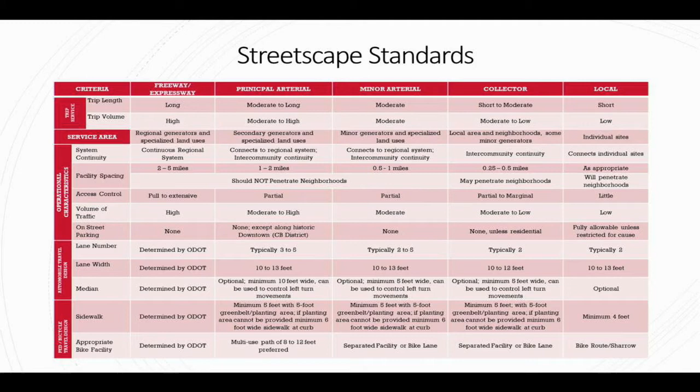This is one of the densest articles in the code. This is your streetscape, access, parking, landscape, signage, lighting, design standards, and sidewalks. So there's quite a bit in here. Much of this has remained unchanged, but what we've done is put it all in one place, put it in tables, and put it in graphics to make it much easier to understand and comprehend. An example of that is your streetscape standards. Depending on the type of road that you're on, there are different standards for each one, where those should be placed, where the sidewalk should be placed, how a median might interact with it. So all of that is now in one table.

For access management, we've put this into a table to make it easier to understand. So in this scenario, if you're reviewing a PUD or a site plan, there's now a table you can reference to go along with your engineering comments in a staff report about where driveways should be placed and how far apart, to ensure they're a safe distance apart.

Through the comprehensive plan, one of the items we talked about heavily was access management. We've noted that some commercial corridors in Yukon have higher traffic and cause backups. Part of that is access management. When every single user has its own driveway, some sites have 4 driveways, and the conflicts created by having that many driveways can create problems. So our goal was to reiterate in a table what proper spacing should be, so you have that as you're reviewing your cases.

And there's also non-residential driveway separation. Within the code, we now have more graphics about what that looks like. On the minor and major arterial, non-residential, it's 500 feet. Say that one more time.

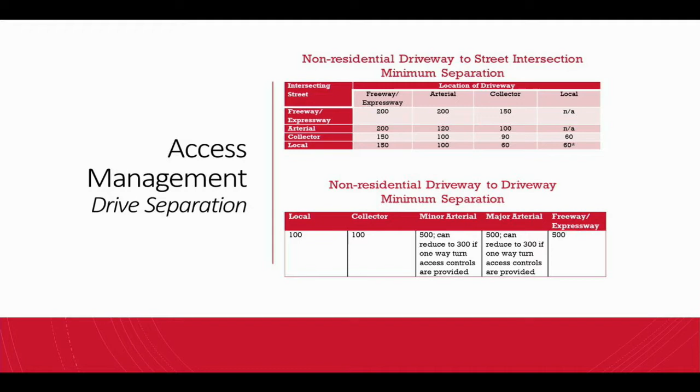And it can reduce to 300 if one-way turn access controls are provided. Is that like you're talking right turn only?

Correct. So if you look at the screen here, occasionally on some intersections or boulevard approaches into developments, you'll see a divider. What it does is prevent someone from making that left turn. Discourage, discourage. Large trucks can always hop it. Welcome to curb, Yukon. It's all about the wheelbase.

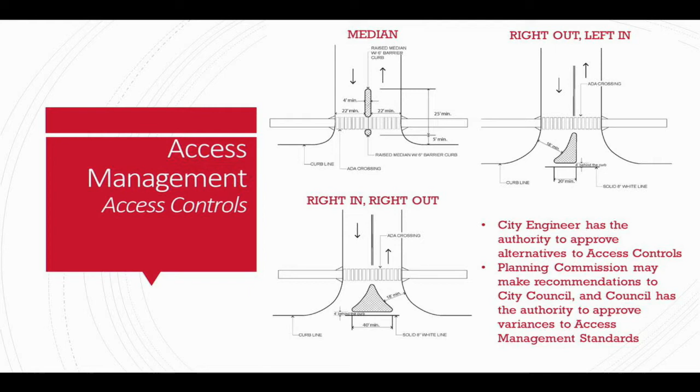Okay, thank you. And so this slide just shows some of those options. Obviously, engineers or design firms can propose alternative ones that you all would review during that plan stage, but these have worked their way into the code.

And then parking and loading. I think sometimes we as professionals in the industry and as planning commissioners know parking stall dimensions, how wide and how deep they are. But if you're just a resident looking at the code or a developer, you might not be as familiar. So we've added graphics to show how these parking lots would lay out and the dimensions required.

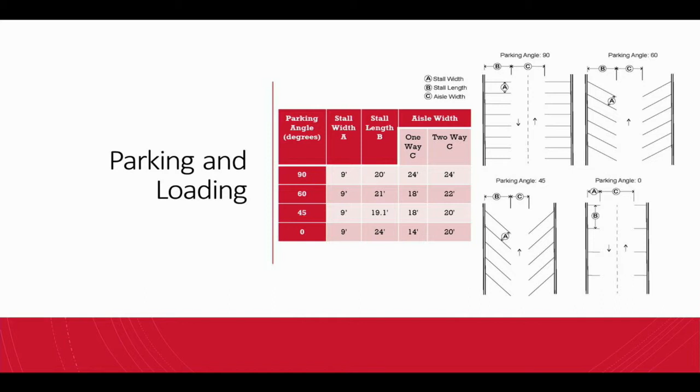Parking and loading, one of the new things we put in the code is the potential for a reduction. In order to receive that reduction, you would have to provide additional landscaping, bike racks, or different types of parking for motorcycles or scooters. But you're only allowed to reduce it up to 15%.

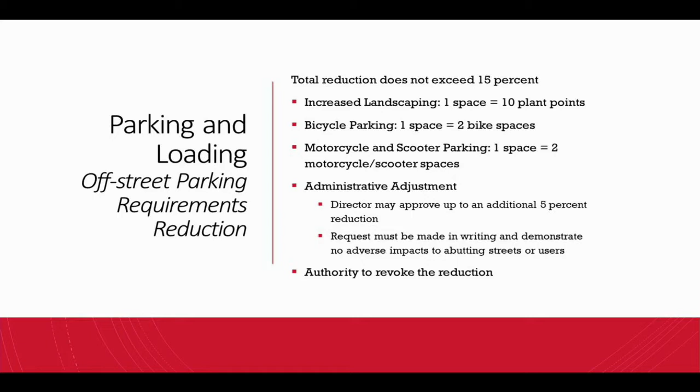I think in recent years, with ride sharing, you've started investing in sidewalks and multi-use pathways, so for some users, code might require too many parking spaces. This gives a bit of a reduction, a carrot and stick approach—if you're getting something in return, you're allowing that small reduction. Ultimately, if a user changed, the city has the authority to go back, and if a parking problem is created, require the current property owner or tenant to make arrangements for additional parking.

Landscaping is one of the big ones. We've talked about it multiple times through the comprehensive plan, in our survey, and through conversations with stakeholders, including Planning Commission and City Council. There's really a feel that our corridors and commercial areas were just not landscaped enough, and not on par with other municipalities.

So this is what the current requirements are: 2 trees plus 1 tree for every 7 parking spaces. Most codes tie parking and landscaping together as a way to calculate that. So what was the change on that from the original code? I mean, that is the original code. Okay, and so this landscape plan is what you would see for this development.

This was a project that had come through recently. You can see there are 2, 4, 6, 7 trees on this property.

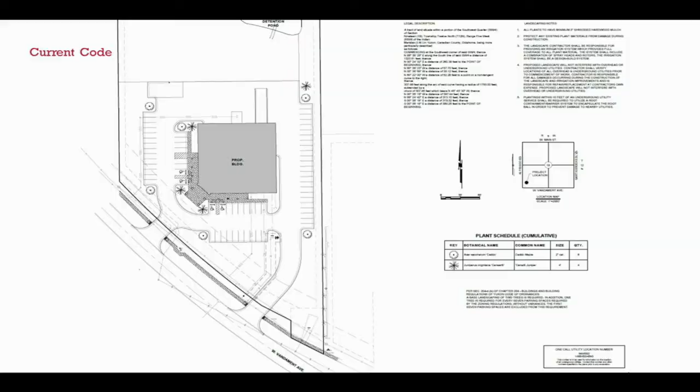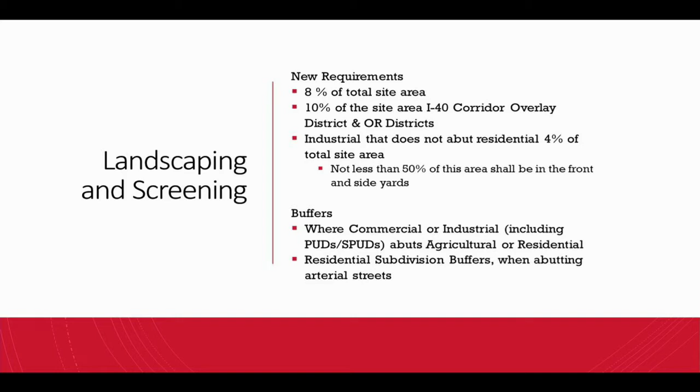With the new code, what we're requiring is 8% of the total site, 10% of the site in the I-40 corridor. Industrial uses that don't abut residential are 4%, and then we have buffers. We started baking into the code mitigation between land uses that might not be compatible. So where commercial or industrial are abutting residential, those landscaping and buffers are more intense because those uses might not be compatible. So what that same site plan would look like under the new code is much more landscaping in the front and on the sides, and then just an overall increase.

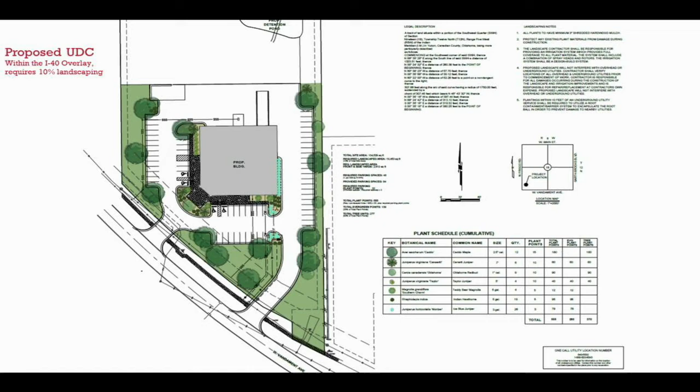We've compared this to Oklahoma City and Edmond. This is not greater than Edmond. It is closer, slightly more than Oklahoma City's code, but we feel like regionally this is an appropriate amount of landscaping. Your current code is not quite providing enough. Mark, I would say that it's right on par with what Oklahoma City requires.

So then we move into lighting. We thought this was a creative approach. There are standards that prevent light spillover from commercial uses onto adjacent properties, and requirements about fixture height. What we liked was we put in the code a maximum restriction. What we're allowing for, though, is if somebody comes in and wants to do something different, they can provide you with a photometric plan showing how it lights up and what fixtures they want to use. That allows them flexibility in their project if the code requirements for the fixtures aren't quite what they want, as long as they provide you the right details to make that decision. So that height is just height above wherever the base of that light is.

Correct. I mention that because in Yukon, we have the future Frisco corridor between 66 and Vandament, where the height of the future buildings is probably 30 to 40 feet higher than the residential to the east. So the light that's 20 feet appears to be at 50 feet to the house. How is that accounted for?

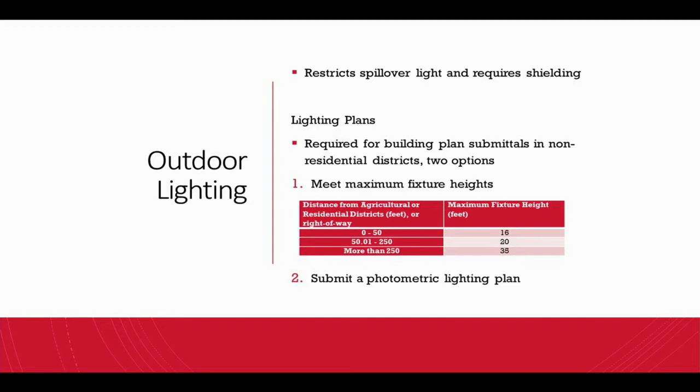The other thing I'll note is to get to that 35 feet, you have to be more than 250 feet away from the residential neighborhood. Is that to the lot, to the edge of the lots, or to the property? Could be to the property structures. Okay, thank you.

Signage—we put in a table with the new zoning districts, but ultimately signage was not amended or changed. We had a meeting with some sign companies and stakeholders, and through this whole process it was always the intent not to change or delve into the sign code.

Sure. I may defer that to Kelly as she looks through the code regarding EMC signs and how that was treated. But we can come back to that after.

Perfect, she finds it. So just a few things. I mean overall it's pretty good, but let's see. So permit procedures, section G. There's a few things that, I think are mistypes, but they do add to some confusion.

I wonder about some of the requirements for permitting, just thinking about today's age and what we're able to get from our clients. Two sets of plans and a digital copy submitted in PDF format seems like overkill. A lot of this is done electronically where you'd just send a site plan. And with site plans needing to be to scale, that's a very difficult thing to produce sometimes. I know the city is open to that, but if we're going to follow the code, I think it can be tough, put it that way.

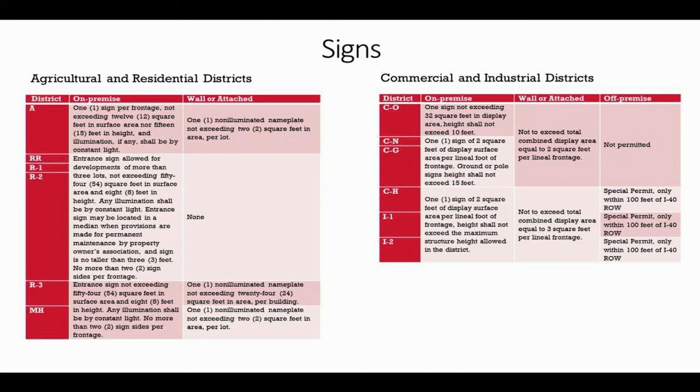So the building materials, this was one we talked quite a bit about at length. Current state statute prevented us from putting any design requirements on single family. It did not restrict design requirements on duplexes or more intense zoning districts. So what we did in the code, knowing we couldn't tackle requiring single-family homes to be 70% brick, was include some design requirements on duplexes, triplexes, fourplexes, and any multifamily projects. The purpose was to ensure those zoning districts and structures have longer-lasting materials.

That's brick, Hardie board or cementitious board, native stone, glass, metal, and all those requirements. We also included a restriction of 25% of architectural metal or aluminum steel on facades visible from public streets. EIFS and other insulated wall cladding is allowed, but only up to 25% of the structure and above the ground floor. We prohibited plain or painted concrete block, tilt-up concrete panels, prefabricated steel panels, and corrugated metal siding, so those would not be permitted.

So for someone to propose something like that, they would be required to come through the rezoning process into a PUD or SPUD to request that. And with that, they'd have to have the architectural details and elevations and be seeking your approval through that process. Yes, sir. However, there was a meeting last week after they got the single-family legislation passed last year.

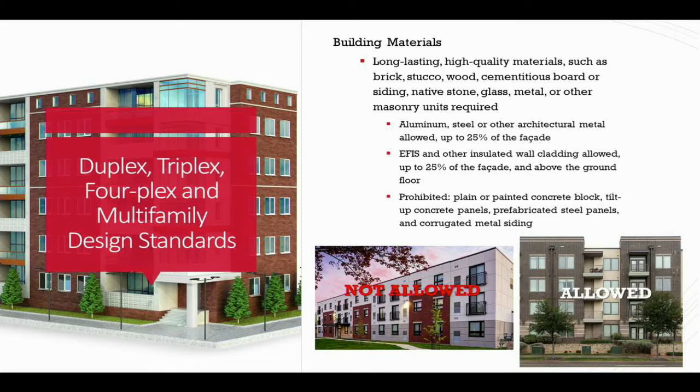So with the duplexes in particular, these are in the code. We went back and listened to old planning commission hearings. We looked at all the PUDs that had been approved to figure out what was being changed when duplexes were being adopted, what was being said, and what were some of the bigger concerns.

So what we did was create these example site plans that are in the code that show you how you'd have to lay out your property if you were constructing a duplex. What that looks like is detached garage versus front-facing garage. The front-facing garage is one of the biggest requirement changes in the code.

Your front porch and front door have to extend closer to your front property line than your garage can. Typically what you see in what's been built is a large two-car garage, big metal door, and the front door of the house pushed back. You have two 20-foot garages right at the front of the street, and that's all you see — no other architectural detail. You see garage and you see roof.

Knowing that we can correct that in the code and create a better product, we've done that — that's what the second one on the screen is. It's showing a smaller driveway that's shared between the two units, so you don't have an expansive 40-foot approach. And then you have those front porches that are also required.

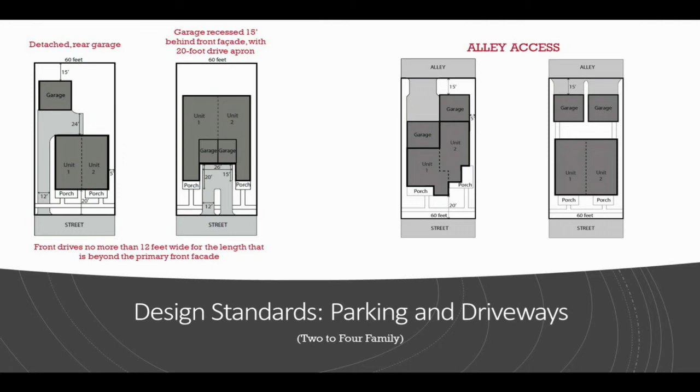It's when the permit application happens, not when we vote on it. Okay, that's good news. Thank you.

This is just an example of if they're not building garages and they have a parking lot, the amount of screening that's required from the street. So it's trees 25 feet on center, continuous shrub plantings, and a combination of berms, shrubs, trees, and/or fencing to create an opaque visual barrier at a height of 3 feet.

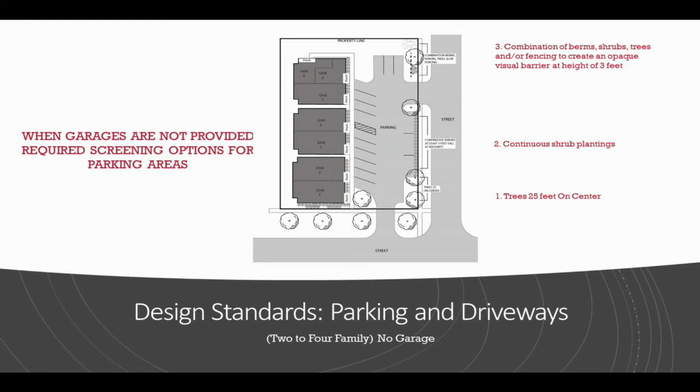These are design standards for some of the entries. Porches have to be at least 4 feet deep and at least a quarter of the unit width. So if you have a 20-foot wide unit, they're going to be required no less than a 5-foot wide porch that's 4 feet in depth.

For courtyards, this would be on a deep lot or a wide lot when all individual entries cannot face a street. They would look inward, kind of like those California bungalow courts you've seen in older TV shows, because they have that courtyard in the middle. And then on corner lots, each entry would face each street frontage. This avoids any one street frontage from getting neglected and just having that blank wall appearance.

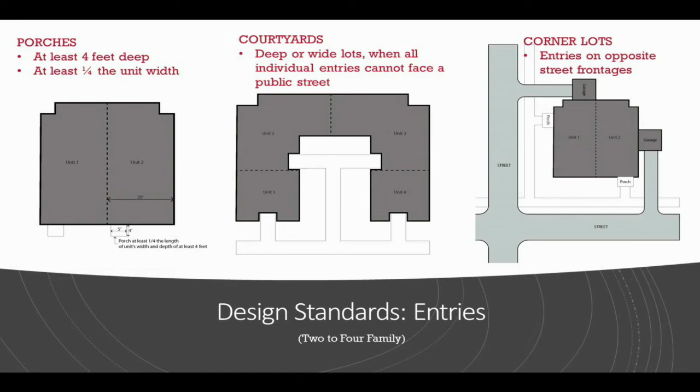And then we move into the commercial standards. This was also one that was talked heavily about during our engagement process. We've prohibited concrete and metal from exterior finishes unless adjacent buildings on both sides have those materials. So if this is in one of the industrial areas and you're smack in the middle between two buildings that have that, you'd be permitted that. But you would not be able to introduce that into an area that doesn't currently have it, and it has to be on both sides. The metal cannot be more than 25% of the facade, similar to the previous requirement.

Safe pedestrian access through parking lots into the building is required. Utility meters in the code, we've encouraged them to be located on the rear and on the sides, not in the front. And then we've got some additional requirements for roofing materials for metal roofs and flat roofs that require certain types of screening of mechanical equipment, so if you have it on the front, you're not looking at the building and seeing the big air conditioner.

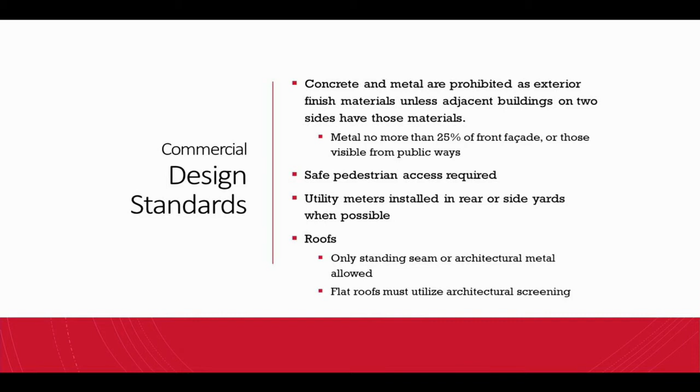Sidewalks, we have put into the code and clarified. We worked with our city engineers on this. So 5 foot is required on all arterial and collector streets, but if they're put adjacent to the curb, then they have to be 6 feet. Our preference is always going to be the 5 foot sidewalk with the 5 foot green belt in between. It gives more separation and is a more comfortable and safe pedestrian experience. And then within subdivisions, we've maintained the 4 foot wide on all local streets, since those have lower traffic, so the narrower sidewalk is sufficient there.

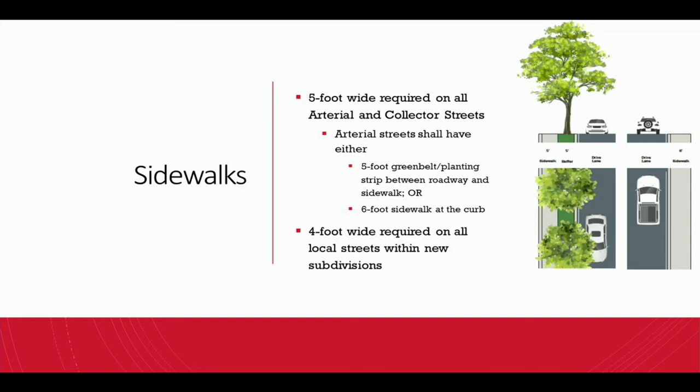So Article 6, we move into the infrastructure and public improvements. This is your streets, alleys, utilities, and other improvements. A lot of this is what came out of the comprehensive plan in working with the city engineer. We're just making sure that it is clear to the development community that when they do a project, what exactly is expected of them from utility improvements, what size lines need to be constructed, and when and where they need to make those extensions. So if they're within a quarter mile, it is just automatic that they're going to have to extend those utilities, rather than use a private well or septic system.

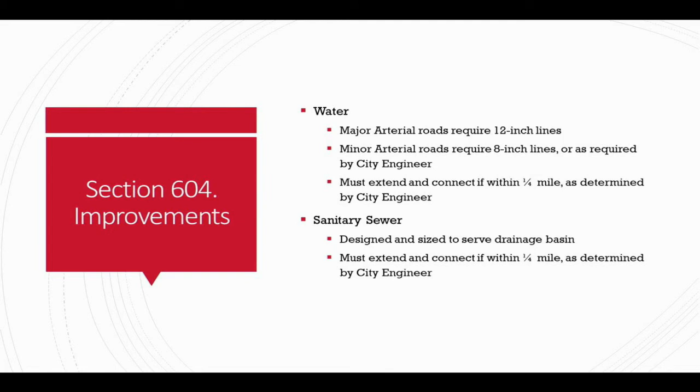One of the biggest things that came through, and we worked with staff quite a bit on this, and I think everyone agreed in looking at the surrounding communities that this was the appropriate path forward. Currently, the developer has to put up a bond for the project, which is a significant cost, in addition to constructing all of the infrastructure before they can record their plat. It is not uncommon for a developer to put up a bond to record the plat, or construct the utilities and roads to have them completely inspected and done before they can record it. It is very uncommon that a developer would have to do both at the same time before recording that plat. It's essentially double the cost of the development to do that.

So when we had our meetings with the consultants and the developers, they all felt that this would be a much better path forward and help encourage development and be a more equitable solution. We worked with staff quite a bit, and we looked at all the surrounding communities, and nobody had kind of that double hit on this. So in this code, we are proposing that they would do one or the other, not both simultaneously.

We've talked heavily throughout the comprehensive planning process that Yukon does not have a lot of large tracts of land left that are serviced by utilities that can be residential subdivisions. But knowing that there are some, we wanted to make sure that the open space requirements were sufficient.

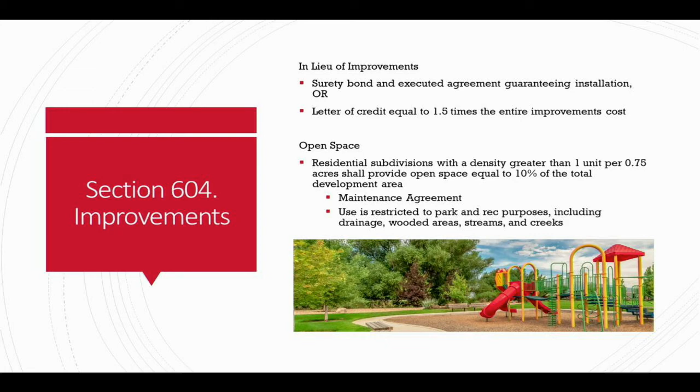Article 7 is the administration section. A lot of this wasn't changed, it was really just put into the same spot in the code.

Article 8 covers the nonconformities. What happens when you update a zoning code and a zoning map is someone will come in and say, I have this building, it has this setback, or it's this height. A nonconformity is likely to be created somewhere in the city. This is a very short article, about half a page, but it basically says that if there's a nonconformity, it's allowed to exist as long as it remains in its current state. When they go to do a major remodel or an addition, it may get brought up to code at that point. But we're not trying to take away anyone's existing right and force them into a major rehab or renovation. Enforcement remained pretty much the same.

I think one of the biggest takeaways of this is it's all one document now. It's all one chapter of the municipal code. It's all in one place, easier to follow, understand, and work through.

In terms of where we're at in the current process, we're before you today with that final draft. We've got some notes and takeaways that we need to follow up on already. We're going to do the same presentation to City Council, and we hope to be back before you in November with a final presentation and ultimately a final vote for you to make that recommendation to City Council, where we hope to be before them in November or December. So by the end of the year, the goal is to have this code adopted with the new zoning map. We'd be happy to answer any questions.